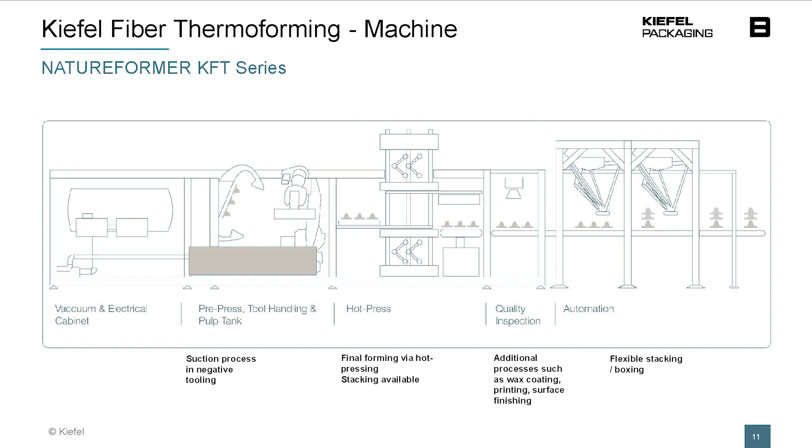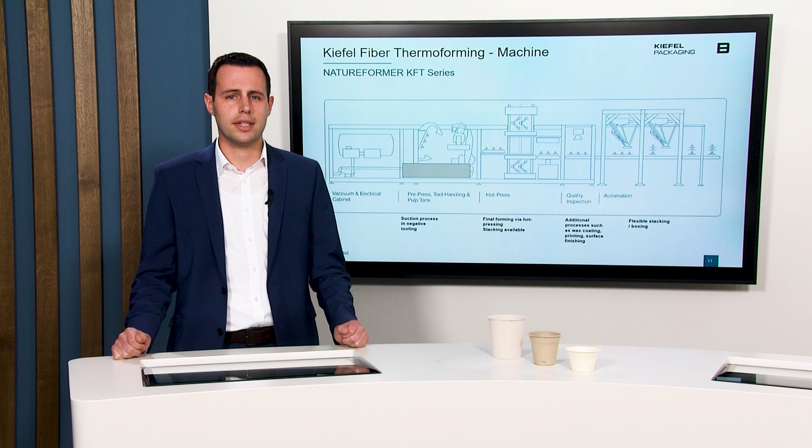We have a pre-pressing station, a cold pre-pressing station, after a hot pressing station. The benefit there is we can reduce the water content dramatically, so you save a lot of energy and cycle time. After the thermoforming process, we can include punching or other automation or quality controls. Please feel free to ask us and we will find a solution.

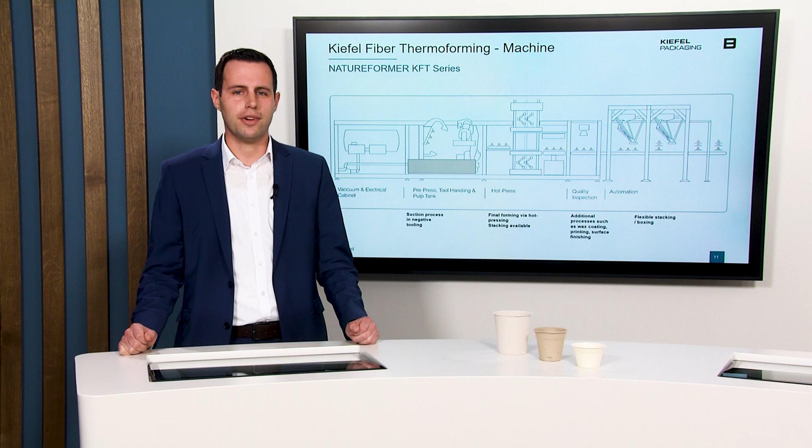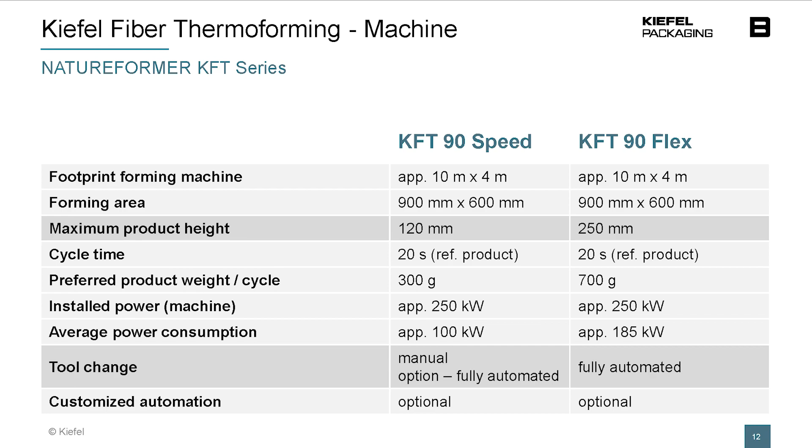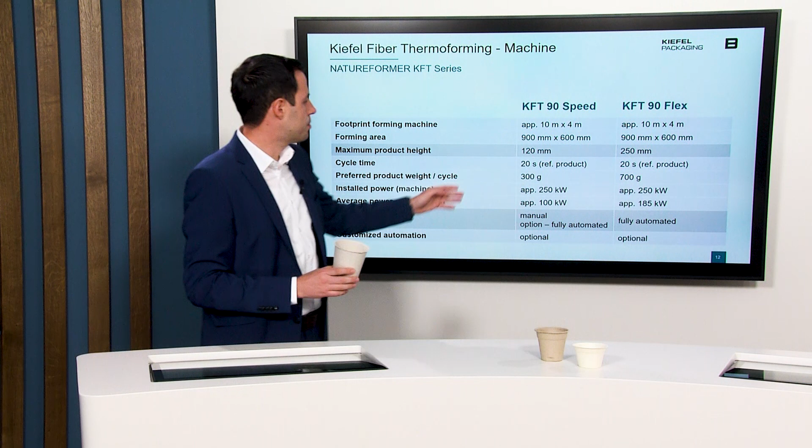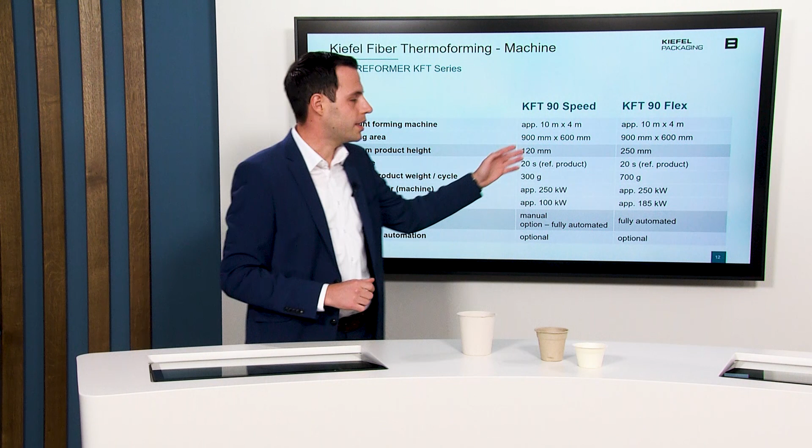Here you can see our two serial models which are now available at Kiefel, the NATUREFORMERs. One is the KFT90 Speed, one is the KFT90 Flex. The main difference here is the maximum product height. For example, for this pasta cup, your suitable machine would be the KFT90 Speed because 120 millimeters is more than enough. But if you're thinking about making bigger products with more height, we can talk about the 90 Flex, which is able to do 250 millimeters.

A next big topic is the turnkey solution. We are a solution partner, so we provide everything from the very beginning. That means the pulp preparation, which is available in different sizes, till the tooling, which we do in our subsidiary in Austria.

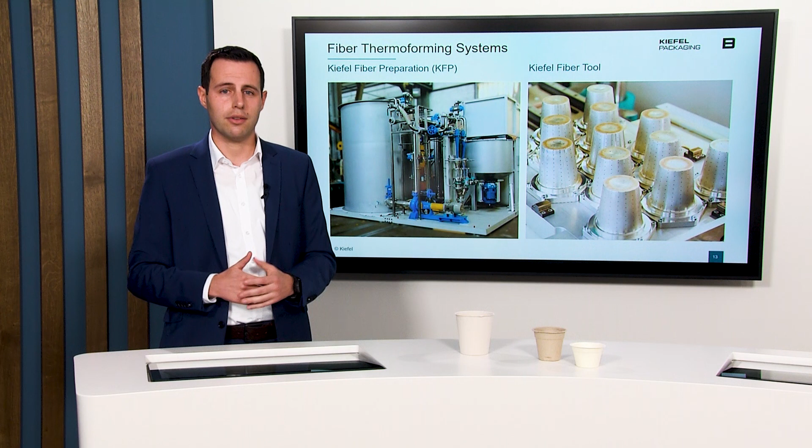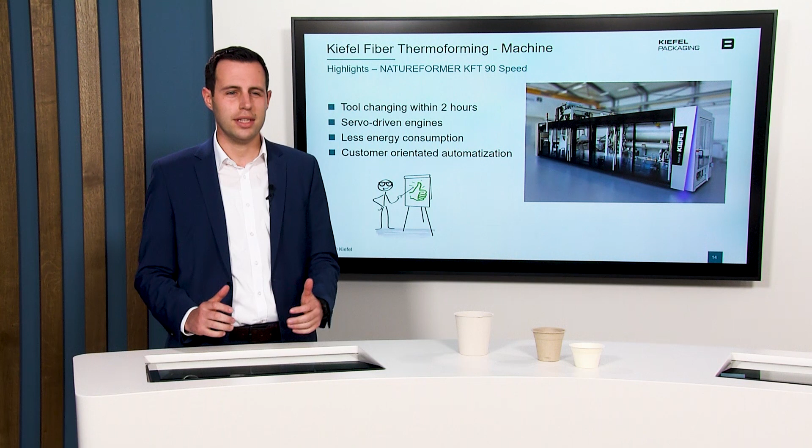Making a short summary about the highlights of our machine which make it very unique: we can offer you a machine which is able to do a tool change below 2 hours on the manual version, and on the automatic version you can do it below 15 minutes. We are using all components which you know from the KMD plastic world, and these machines have been in the market for so many years, well-proven parts.

We are using servo-driven engines which are also used in the KMD machines, also in the KFT machines. Because of the servo-driven engines you have less energy consumption, along with our pressing and pre-pressing concept. We have the whole portfolio available in regards to end automation, packing, sleeving, stacking, whatever you want, everything is available.

Now I would like to give you a short overview about our shop floor right now. We already sold the KFT machines to Europe and USA, and we have many machines on the shop floor which are now waiting to go out to our customers. Please sit back and enjoy the video of our shop floor.

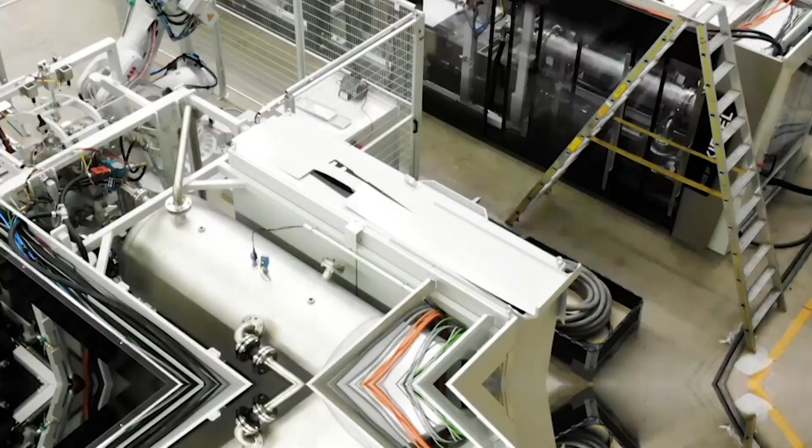Here in Freilassing we live in a wonderful countryside in the Alps, and we love to go on the mountains. We know that good preparation is necessary to reach the top of the mountain, the peak. That's our goal, and we want to reach the goal safely. Our goal is to produce a perfect product, and we want to reach this goal like the mountain peak. We know we need to start with the material, the raw material, the fiber material.

Because of that, we figured out for Kiefel 3 topics: the raw material, the mixtures and additives, and also the machine and the process is necessary for us. With these 3 topics, we do a lot of work at Kiefel.

We built up a laboratory and also the equipment in the laboratory. We do research on material and mixtures, and we also have a test area to check out the suitability of the fibers in our process. Development is our focus, and we do it together with our customers. We do it for our own so that we improve our material, bring out new ideas for the benefit of our customer. And we work together with partners so that we can step forward faster.

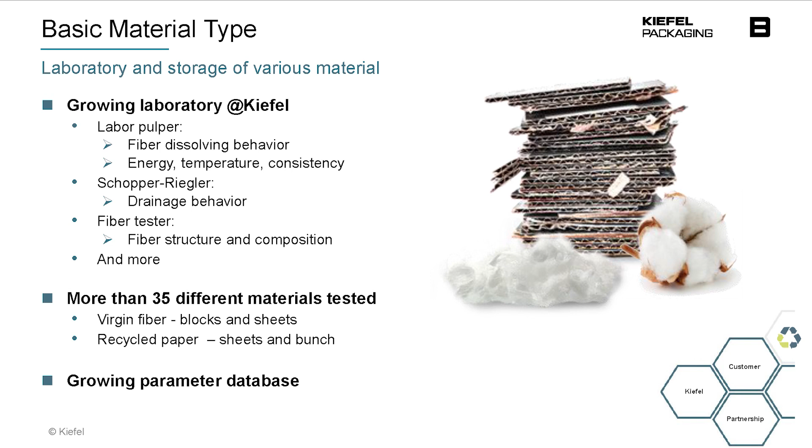I want to start with the laboratory. We built up a laboratory here at Kiefel with several equipment, still growing. For example, we have a fiber tester in-house. We also do a Schopper-Riegler test to check the dewatering. We also have a storage of a lot of material in-house so that we can test a lot of different materials, and we create a database with a lot of specific parameters. But let's have a quick look in our laboratory.

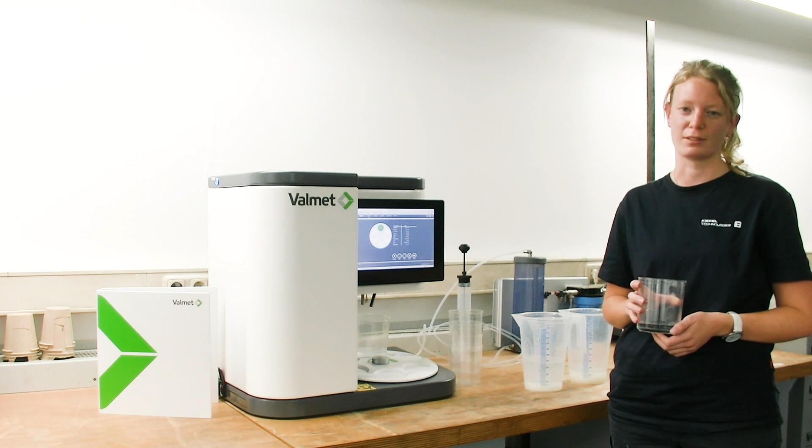Welcome to the Kiefel Fiber Laboratory team. My name is Olga Siebe and I'm responsible for various material tests here in the laboratory. For this we have various materials from customers and from our own, and for the various tests we try to understand the material. In our laboratory we have various measuring devices, for example our fiber tester. With it we can look at the basic structure of the fibers and see, for example, the fiber or fines distribution. To see the measurement, I prepared one sample.

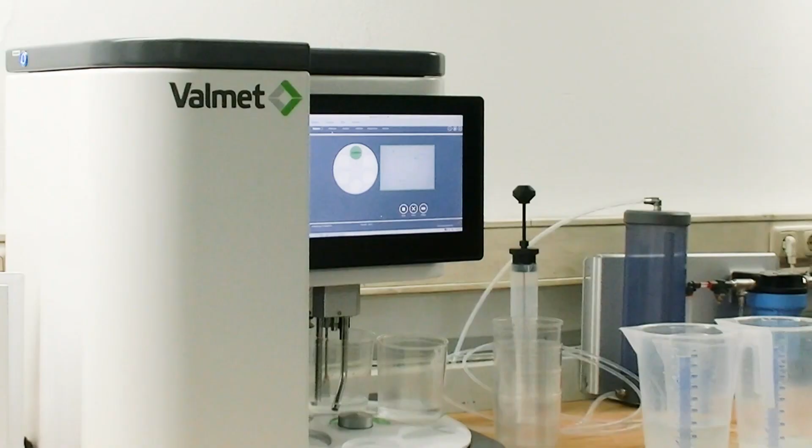Most of the products we have here are not made out of one singular material. Most of them use mixtures of fiber, different fiber materials and or additives. And that's also something we are focusing on here at Kiefel. We work with different fiber recipes to see their behavior, the dewatering and how it's processed, how we can pulp it. We also check out additives in combination with materials, single materials, but also with recipes. And finally, it's important for us that we always have the process in focus so that we see if the fiber is working in our machines, and the tools, if we have some effects or some interesting changes in our process to get out the right parameters. But let's have a quick look at our laboratory and see what we're doing there.

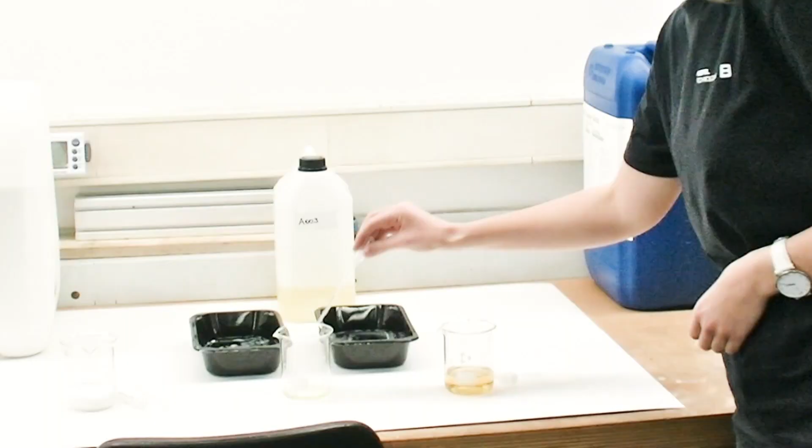Testing material in our storage.

Finally, the best material is useless if it's not working in the process. And we want to have the material working on our KFT thermoforming fiber machines. Therefore, we have a test area where we have two test machines. A small one where we try to figure out the main parameters, like temperature ranges, cycle times, dewatering rates, and so on.

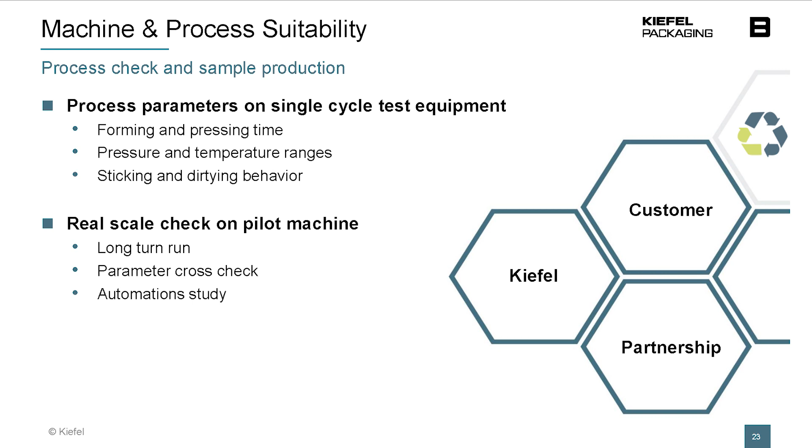To get more into detail, we have also a pilot machine where we do sample productions, where we check a long-term run to see if we have long-term effects like mesh clogging or variation of product weight. But let's have a look at our test area.

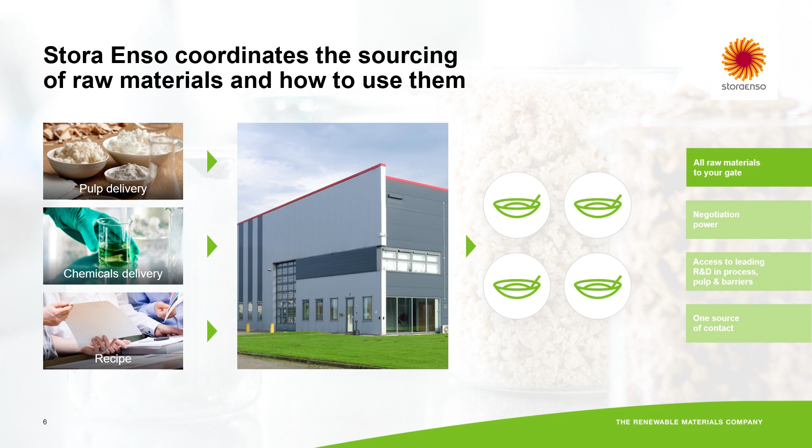All of this so you can focus on your customer needs instead of working too much on the sourcing and the recipes. Focus on your customer needs. What does your customer have as an end use, and how can you make a fiber-based packaging to match that?

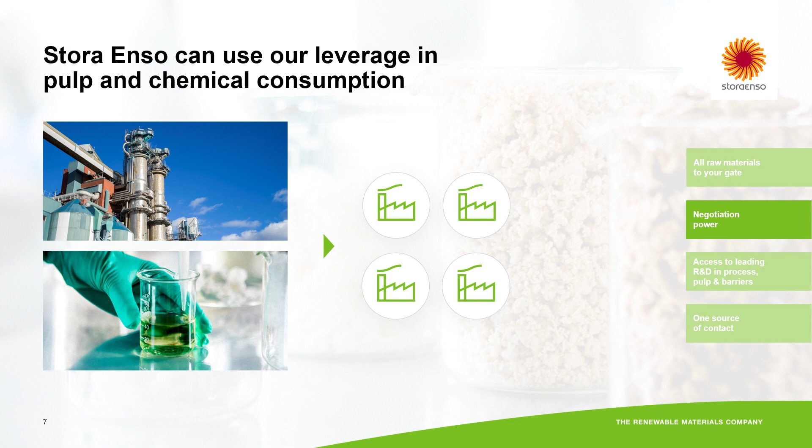Negotiation power. Stora Enso is a large consumer of chemicals from our pulp and paper mills, and we are in partnership with our chemical supplier. So we can make sure that you're getting the right pulp from us, but also the right chemicals at the lowest raw material cost. We negotiate a package for you.

Development. Stora Enso is on the forefront when it comes to formed fiber development. You might have seen our press release announcing that we have this PFAS and plastic-free barrier in formed fiber. That is only the beginning. We are constantly developing the technologies for new barrier properties in formed fibers. So we are the material partner to go to in this case.

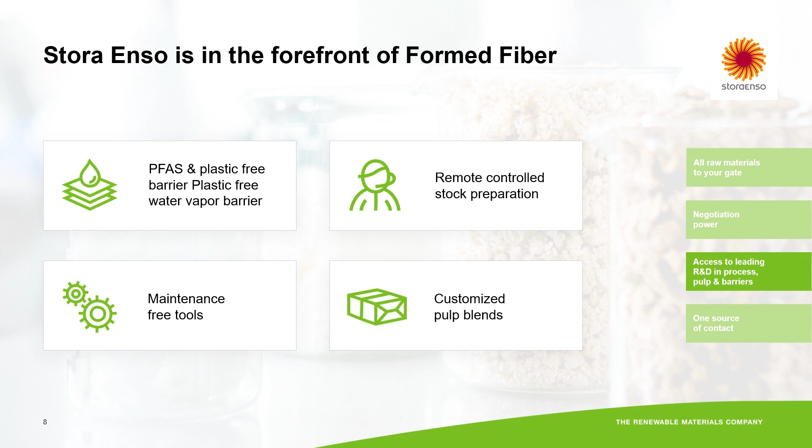And we are, of course, working together with Kiefel on new developments. We are working on remote controlled stock preparation to keep the cost efficiency in the preparation of the stock as high as possible. Then we're working on a maintenance-free tool to keep productivity up and maintenance costs low. And since we are one of the biggest pulp offerings in the world, we are looking at customizing the pulp blends for the optimum experience, whether it be haptics, color, or other properties that you need.

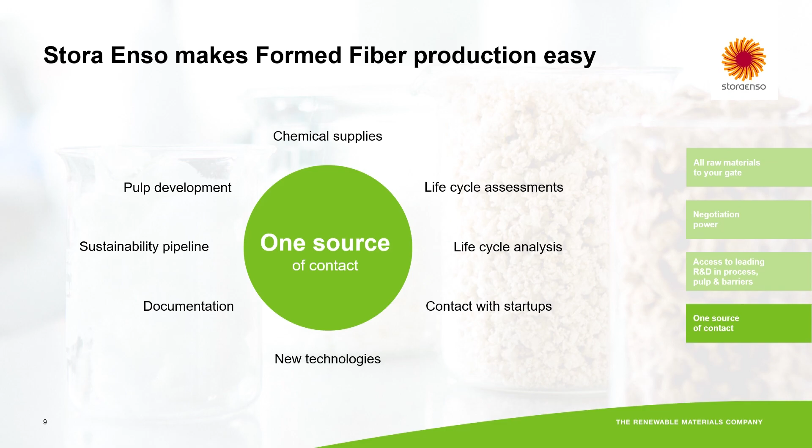And you can get this with just one source of contact. We are in dialogue with the chemical suppliers for the latest technologies. We can help you with such things as life cycle analysis to quantify the climate impact. And also, we are in discussions with many startups to make sure that we're getting the latest technology in this growing area of formed fiber that we're seeing today. And you get access to our R&D pipeline, where we're introducing so many new technologies in the coming years.

Then we're going to build the price based on the pulp index, because pulp is a volatile market, so we need to tie it to an index as it goes up and down. But you will have the chemicals included, so it will be one price for pulp and chemicals, just to keep things easy. And we're taking this on a raw material basis to keep the cost down to make it efficient.

Then we're adding the subscription fee, and the subscription fee will vary a lot depending if you're choosing something very low, which doesn't demand a lot of chemicals or recipes, or if you're choosing something that could contain a license fee, for instance, for patents and so on. So the differentiator is in the subscription fee, but then we're keeping the raw material costs as low as possible. And then you only get one invoice for all the materials and the recipes you need.

So Stora Enso has a long history and experience when it comes to barriers in fiber-based food packaging. As I said, 150 million euro per year in R&D and innovation. A lot of this is going into development of new barrier technologies. We know the barriers needed in food service when it comes to fiber-based packaging. But it's much easier to pick barriers when you have something to choose from when it's made out of carton—it's easier to apply on a reel.

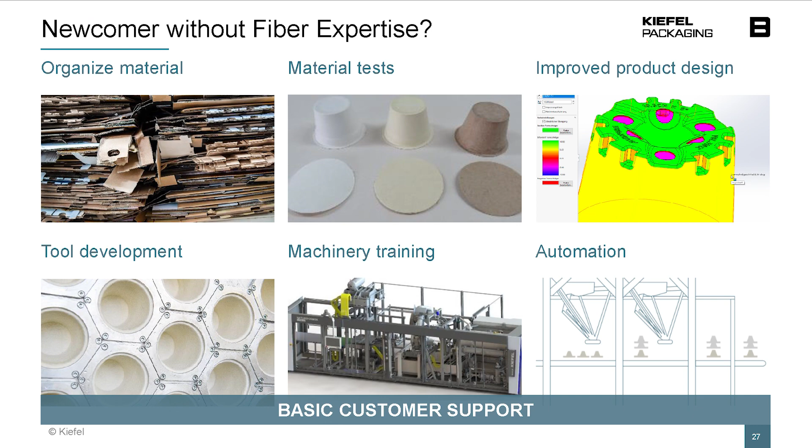Kiefel provides a huge network for fiber products and additives, so we can help you out with material for the first tests and to get familiar. These material tests could help you find the right mixture and the right design for your products, because design is very important for fiber molded products. Particularly if you come from plastics, you need to rethink the design of the product. This is very important for a stable process.

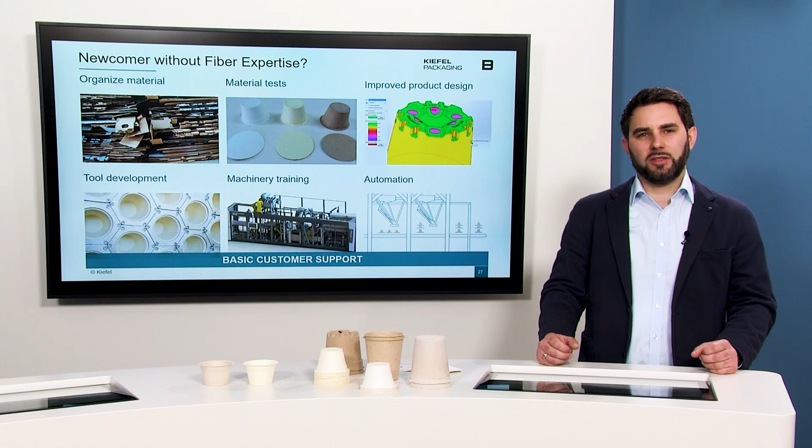Also, the tooling itself is very important, and together with you we will find the best approach for your tooling. For the machinery, we can provide many drawings and charts to get familiar with the machine very quickly. By the time you get the machine into your plant, we can support your staff with the training. Later on, you will hear more about the automation, but sometimes we should discuss it at the beginning of the project.

If you're already an expert in fiber molding, we can skip a few things at the beginning of the project and should discuss the right fiber preparation. Kiefel offers a wide range of fiber preparation. In our portfolio, we have a small one for R&D, a mid-size one, and also a tailor-made system, which could be brought to the highest level, and this is really modular.

We also can do real samples on a single cavity tool, for example, to acquire new customers and to make tests together with plastic lids, or just to feel the product, the trays and the cups.

If you like to plan your production in a new plant, for example, we can provide many information. We can support you for the calculation, input, output, meaning electricity and products per day, for example. Just ask us.

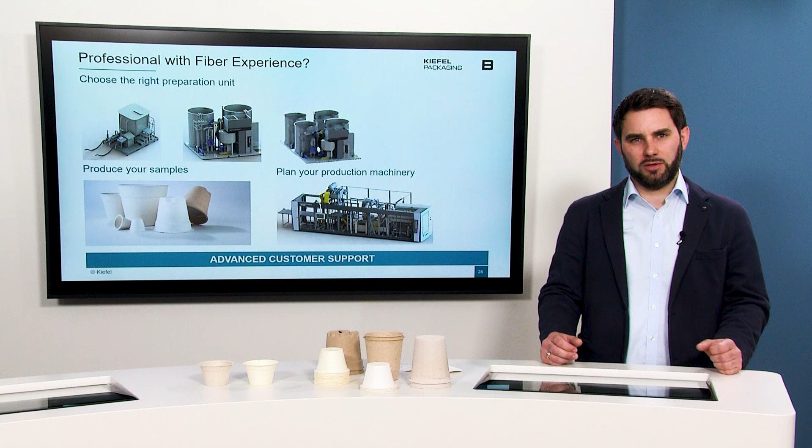As you can see, we are able to make samples in a small size, in a small range, and we are able to make samples with a higher dimension and a higher quantity. I will show you some tests later on.

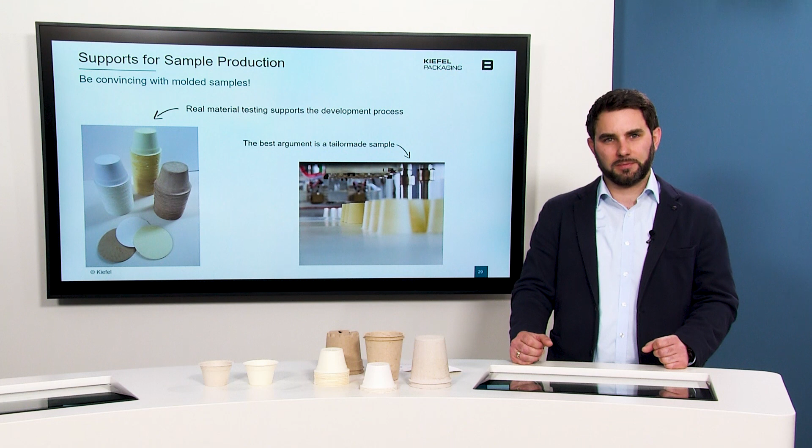So I like to do a live demonstration for you, because many times we are asked about the water resistance of products and the oil and grease barriers.

Some vegetable oil. Later on, we will have a look again to these products, and we will see they will keep the liquids inside.

A more obvious test of sizing, to see if it works well, is to make simple discs and test the material combination with additives. If you put in blue ink and there's no sizing, you will see the ink is fully soaked in, and you will see it also on the back. If the material is already sized with some chemicals, it's a smaller point of the same drop of ink, and on the back you won't see any ink.

Sure, we can do a Cobb-Unger test in the laboratory, but this is a simple approach. You can do it also on your machine during production to control the output.

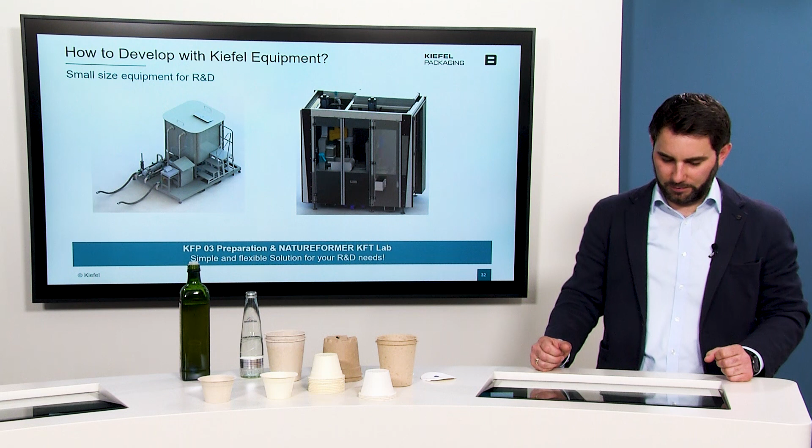The smallest equipment we can provide is our KFT lab. It's one part of the NATUREFORMER family, and is thought for R&D purposes and for making small size and small numbers of sample products.

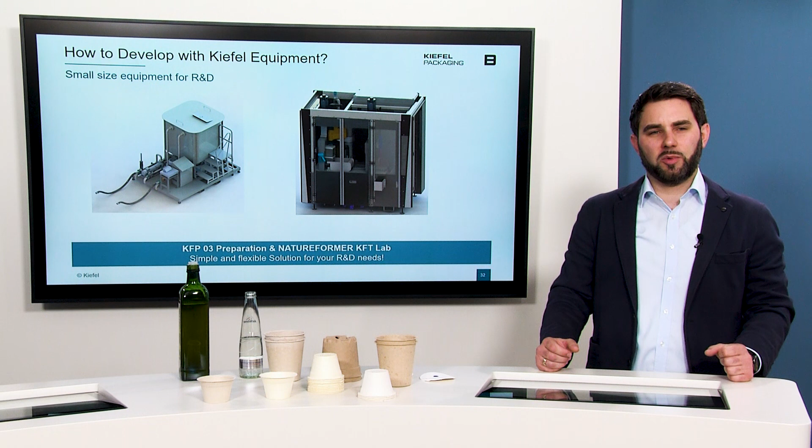Of course, we provide the best and the suitable preparation unit. It's called KFP 03.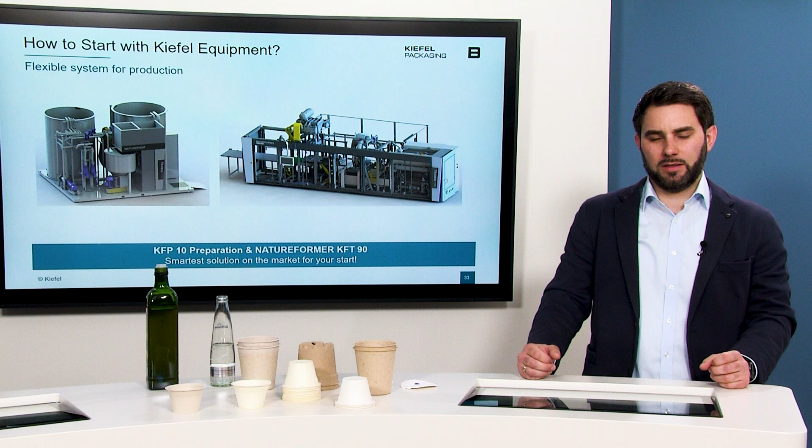Our typical machines are the NATUREFORMER KFT 90 and Flex and Speed, and these machines could be combined with our KFP10. This is the best setup for initiating a production. So you can buy one KFP10 and a nature former, and later on you can add more nature formers to increase your output.

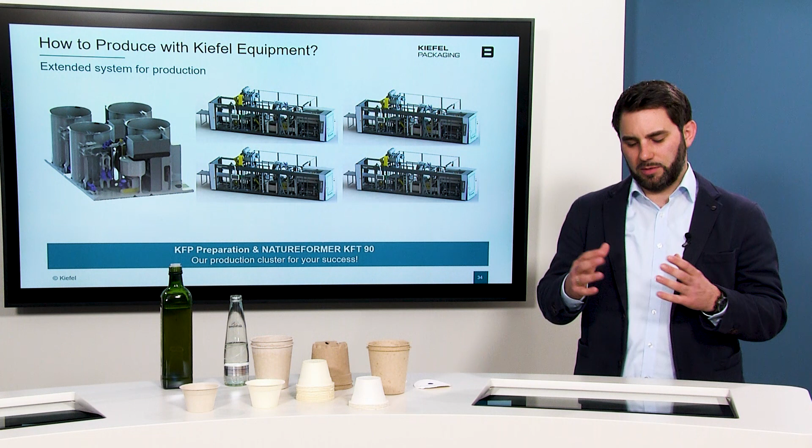If you're already thinking in huge numbers and, for example, planning a new plant, we should think about a cluster of 4 machines and a tailor-made preparation unit. As mentioned before, this tailor-made preparation unit could be done by modulars or could be completed by different systems, refining, additives and some other equipment, helping you achieve maximum output.

Now we heard a lot about the machines, and now we are keen to know more about the tooling, and Daniel will introduce Kiefel Packaging.

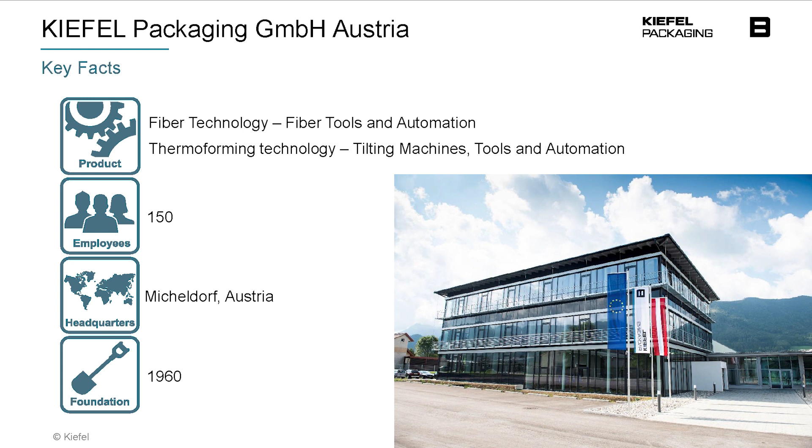Kiefel Packaging Austria, or in general Kiefel, is a united company. Kiefel Packaging Austria is mainly known for the tooling and automation. In Austria, we have 150 employees, and we were founded in the 1960s. Therefore, our passion is to make tooling and automation.

We started with the tilting machinery, especially coming from the plastic industries. Now with Kiefel Germany together with Freilassing, we developed our nature former, our pulp and paper production. So with our 150 well-experienced tooling and automation employees, we want to go forward with you into a sustainable and, how should I say, green future.

So, heavy metal, our passion. Also, our passion is to have well-experienced employees. We also have a well-equipped Kiefel Packaging Austria standard. So, with our new machines and also our hall where we have the tooling experience, we have several machine types, from grinding to tilting, measuring, so the whole story of what you need for perfect tooling.

And this I want to bring you a little bit closer in the next video, so please enjoy a small video from our production hall.

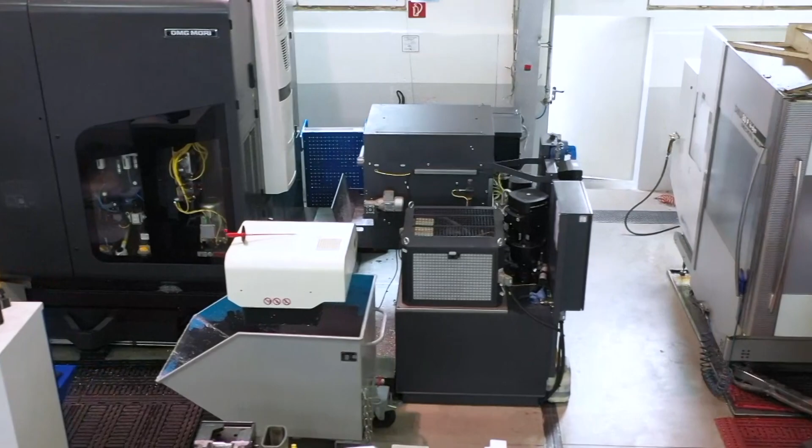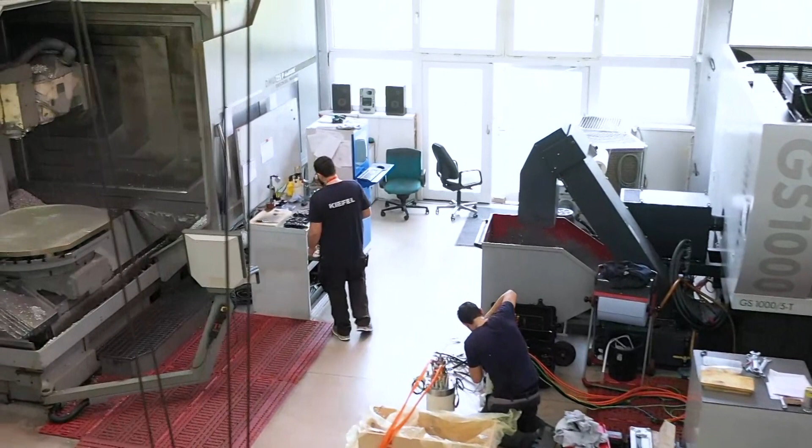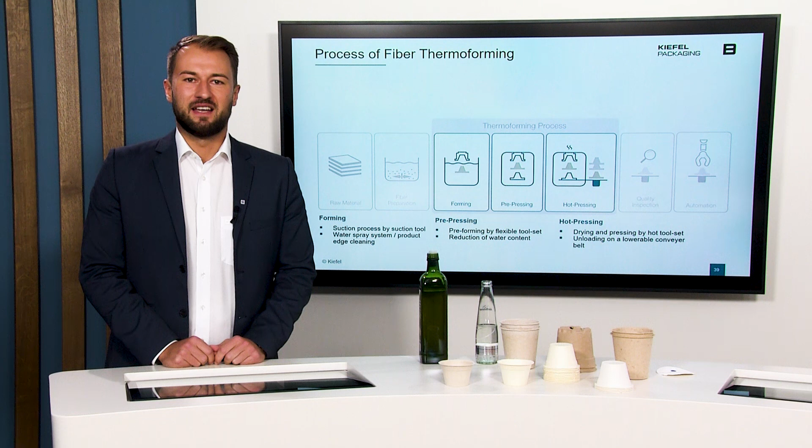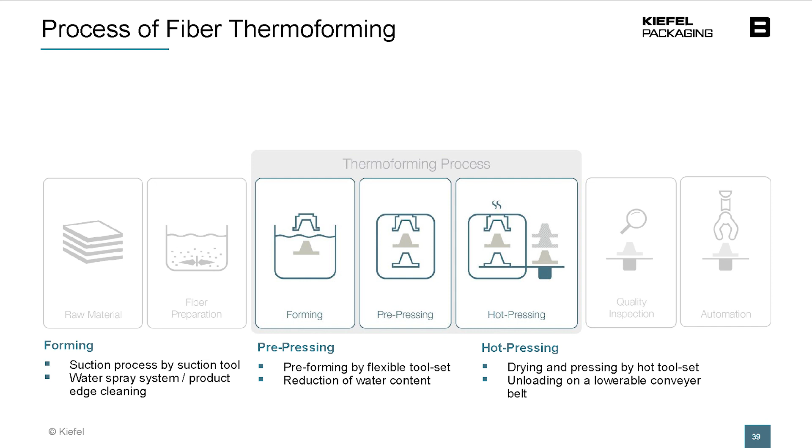Welcome back. Now I want to go with you into the process, one stage deeper into our process. The process of the tooling is split into 3 stages or levels: first the forming, the pre-pressing, and the hot pressing. So let's start with the forming process.

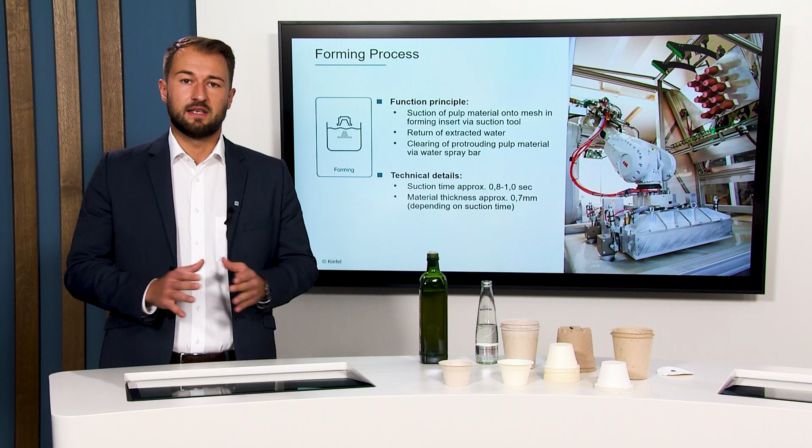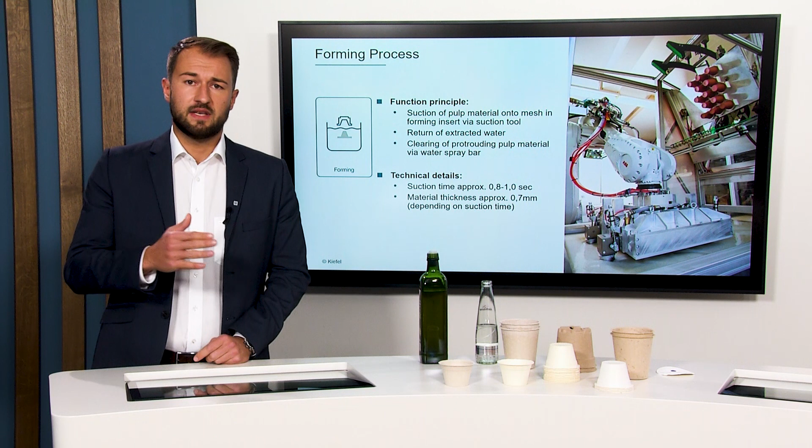For this we have our suction tool, and the suction tool makes the first cake or the first preform. We also have a bar which supplies us with water to take away the material which is not useful for our production. So first step, we go to the suction, we go to the pulp basin, make the cake, bring the fiber into the forming insert, and then we clean the tool.

So the suction time is approximately more or less 1 second, and we can reach 0.7 millimeter thickness. This is the forming. So from the forming we go to the pre-pressing.

The pre-pressing is especially energy efficient. We try to get a high dry content of our product. Why do we want to do this? Because we can save energy in the next step. So we go for the pre-pressing to bring the water which is not useful for our product out of the forming insert.

So the dry content will be later on between 30 and 40%. We also have less angel hairs, and a more complexity of tools is available and products. So that's the energy saving pre-pressing.

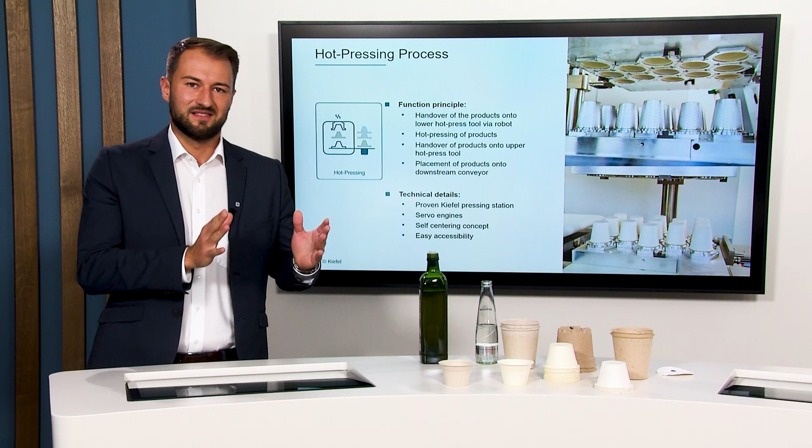After this, we bring the product on the upper tool to our conveyor for the automation later on. The automation is now a signal word which I want to follow. So you heard from me the tooling side: forming, pre-pressing and the hot pressing. And now I want to go with you to the automation.

Automation is depending. So you can make some units or pool some machines for one automation, or you say, okay, I want to have it more tailor-made. So please, if you have some requirements or you want some quality inspections with cameras or what else, please get in touch with us. We want to support you, and we're always open-minded for tailor-made solutions, so please get in touch with us.

So one example which I want to bring you a little bit closer is our Vertipacker. This system is well known and also well proven in the market. We use it also on the machinery for plastics, and we can use it for nature products, fiber products. So I want to give you a short example of how the Vertipacker works.

So you have a carton infeed as well as a product infeed. The product comes into the machine, where we have a combined unit - meaning we have a sleever in it and also a carton infeed, a carton storage box. The product goes into the machine, and we can sleeve the stacks, bring them to the carton, seal the carton, and label the carton. So all of this is possible.